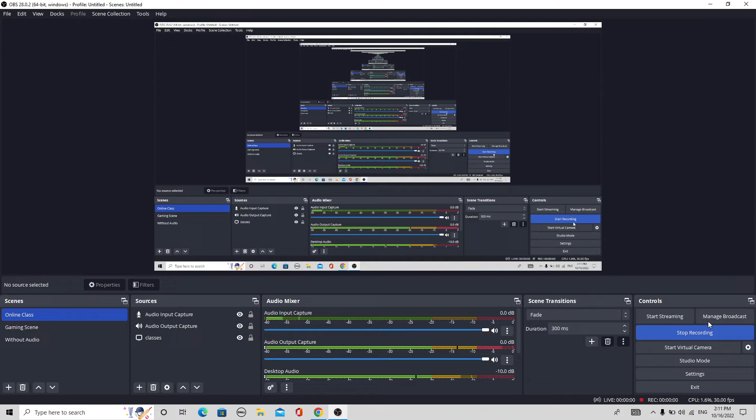गएको लेक्चरमा हामी एक्टिभेटेड स्लज प्रोसेसको बारेमा कुरा गर्दै थियौँ र केही इक्वेसन्सहरू हेऱ्यौँ, हाउ दे क्यान बी डिटर्माइन्ड इन टर्म्स अफ एक्टिभेटेड स्लजको प्रोसेसमा सबस्ट्रेट र त्यसको।

बायोमासको मास ब्यालेन्सबाट we saw that we derived some equations, right? I think we talked about, let me go over to the equations. So we derived some equations using the substrate as well as the biomass को ब्याक्टेरिया अथवा बायोमासको ब्यालेन्सबाट we

determine some डिजाइन इक्वेसन्स। त्यसैगरी हामीले स्लज प्रोडक्सनको इक्वेसन हेऱ्यौँ। एफ्लुएन्टमा बिओडी भनेको बायोडिग्रेडेबल सिओडीको होइन। नर्मली तपाईँको बायोडिग्रेडेबल सिओडी र उसको रिलेसनसिप बिओडीको रिलेसनसिप अराउन्ड 1.6 टाइम बिओडी हुन्छ। जेनरली तपाईँको बायोडिग्रेडेबल सिओडी भनेको इट्स अलमोस्ट 1.6 टाइम अफ बायोलोजिकल अक्सिजन डिमान्ड।

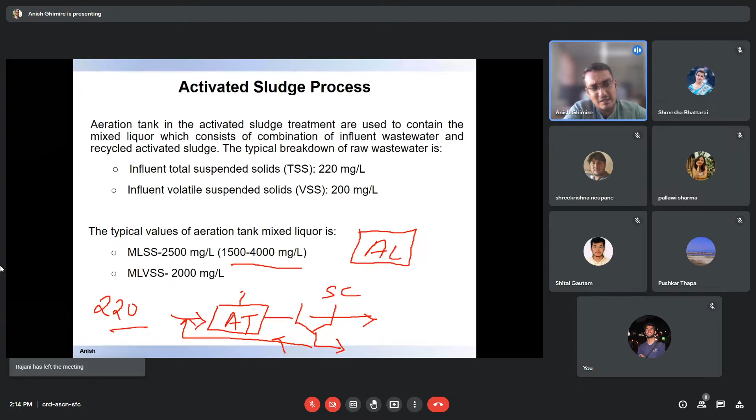तपाईँको इन्फ्लुएन्ट वेस्टवाटरमा around 220 milligrams of TSS हुन्छ, while inside the aeration tank we have 1500 to 4000 milligram of MLSS or close to 2000 milligram of MLVSS। So this is how activated sludge configuration looks like।

So these are preliminary treatment। We already talked about the preliminary and the primary treatment in water quality engineering। So primary treatment, and afterwards there is an aeration tank where there is a biological system।

and a system with sludge recycle। Even in a system with sludge recycle, we discussed two options: one from underflow of the settling tank।

So if you are still remembering the lecture from our water quality engineering, we did some flow, like we talked about some flux theory, as well as type 3 and type 4 sedimentation, for designing a settling tank।

Settling secondary clarifier, the design of secondary clarifier, it's entirely different, it follows a different approach। I think we will also talk about this settling, it's in a separate chapter for that।

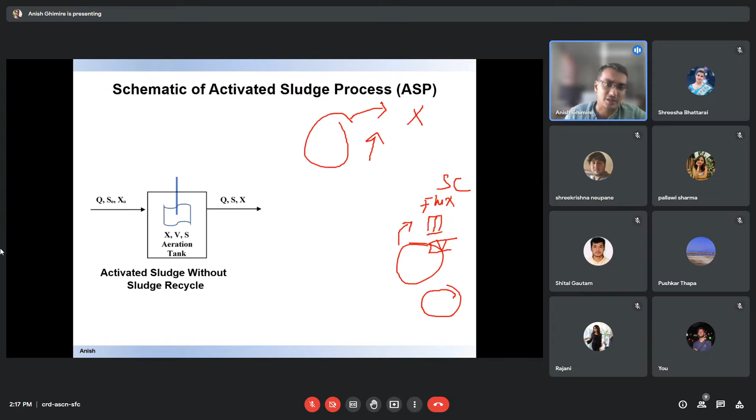I think this is important to know because we also define the SRT as the mass of solids in the reactor divided by mass of solids leaving the system। So if you want to calculate the SRT for this kind of system and this kind of system, you need a ratio between mass of solids inside the aeration tank and mass of solids leaving from the system।

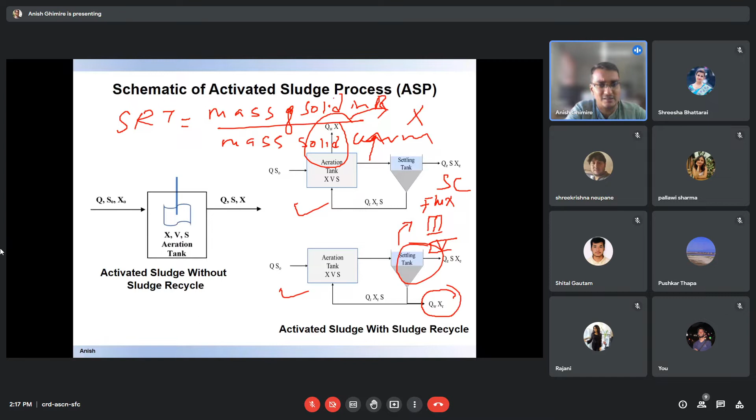Normally while calculating the SRT, we consider that there are negligible losses in the effluent, so the only losses are via the waste activated sludge. This is the assumption we make.

In the sludge system without recirculation, the HRT or hydraulic retention time is the same as the SRT. While in a system with recirculation, your SRT is much larger, or longer, than the HRT.

Let's look at the types of systems. Within the activated sludge treatment process, there can be a high rate system where the food to microorganism ratio is measured as the total BOD coming into the reactor, that is the concentration of BOD in the influent, divided by the biomass in the system and the working volume. This gives you the food to microorganism ratio in the system.

For the extended aeration process, the SRT is long because of extended aeration. Normally we keep a very long SRT, meaning there is enough time for the sludge to stay in the reactor. So there is a chance that the microorganisms or biomass become more stabilized compared with the conventional system. Also the loading rate, or food to microorganism ratio, is less in extended aeration compared with high rate processes. In a high rate process, both the OLR is quite high and the HRT is quite small, compared with extended aeration.

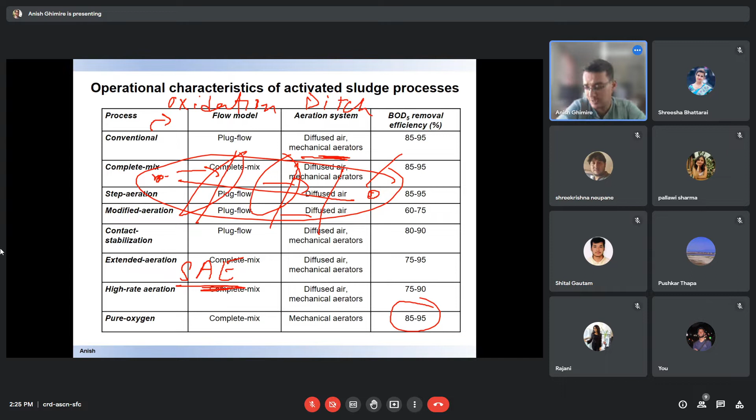So the expected removal efficiency percentage is also different. It's up to the designer's discretion what kind of system they would like to design.

So again we slightly talked about the return activated sludge. Let's draw one diagram again - you have an aeration tank, a secondary clarifier, and then there is a sludge wastage from the secondary clarifier, and a recirculation. We call this recirculation the return activated sludge. So there is a recirculation system - let's say this is a secondary clarifier.

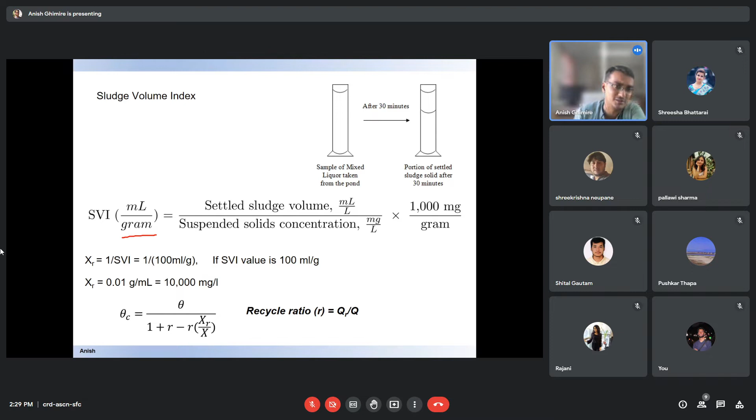So SVI is the volume occupied by 1 gram of sludge. That's why its unit is milliliters per gram - how much volume is occupied by a gram of sludge.

So how do we calculate the SVI? The SVI is calculated using a graduated cylinder.

Let's say you take an aeration tank effluent or sample it from the aeration tank, and you take a 1 liter graduated cylinder, and keep this sludge as a representative sample.

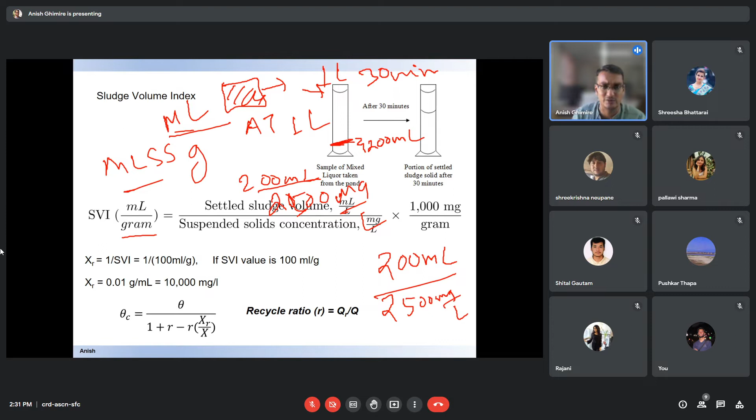In this case, we use this factor of 1000 to convert milligram into gram. So what is your SVI in this case?

So how much is the SVI concentration? It's 200 divided by 2500.

So the value of your SVI is around 80. Let's say it's 80 ml per gram.

So when your sludge SVI is less than 100, you can infer that the sludge has very good settleability.

The sludge settleability is good enough. If your SVI is less than 100 - the lower the SVI value, the better sludge settles.

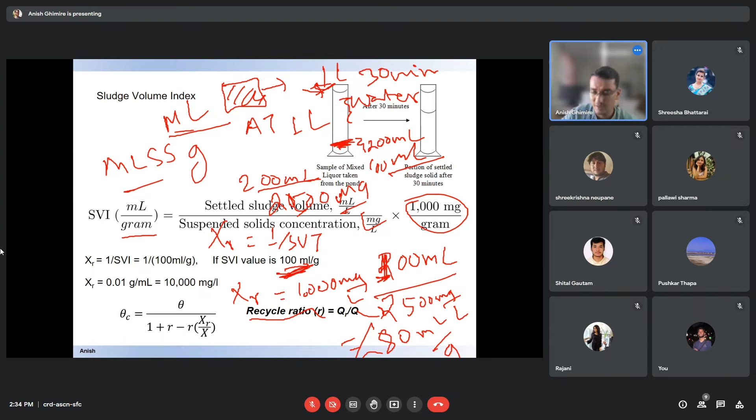The recirculation ratio is a ratio between the return activated sludge flow rate and your flow rate coming into the treatment plant. If Q is your inflow and QR is your recirculation flow, then the recirculation ratio is QR divided by Q. This gives you the recirculation ratio.

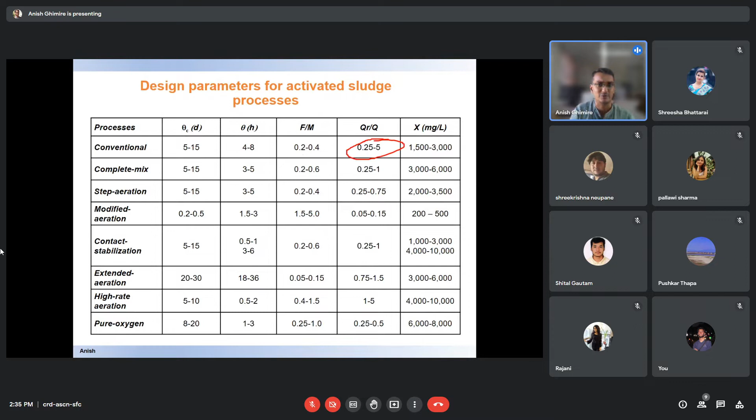In a conventional activated sludge process, the recirculation ratio can vary between 25 percentage of the inflow Q to 500 percentage of the total inflow, depending on your influent characteristics. So your sludge production can be affected, and the recirculation rate is affected similarly.

You can see that different concentrations of biomass have been maintained. In modified aeration, it's only 200 to 500 biomass. In step aeration it's around 3000. In conventional activated sludge, completely mixed system, it's around 3000 to 6000. I think when we last visited the Guheshwori activated sludge plant, they had a concentration around 4000 to 4500. I think the treatment plant has been designed and operated as a CMAS system.

The concentration of biomass there during the visit was MLSS, not MLVSS, so there is a difference. We have MLSS and MLVSS - MLVSS represents the organic fraction of the biomass, while MLSS represents all the organic as well as inert fraction. This ratio is typically around 0.6 to 0.85.

This can vary. When you have a high value of MLVSS to MLSS ratio, this means you may have high active heterotrophic, ordinary heterotrophic organisms. When you have a low value, this means you have more inert material in the system and less active biomass, which is not so good for the operation of the system.

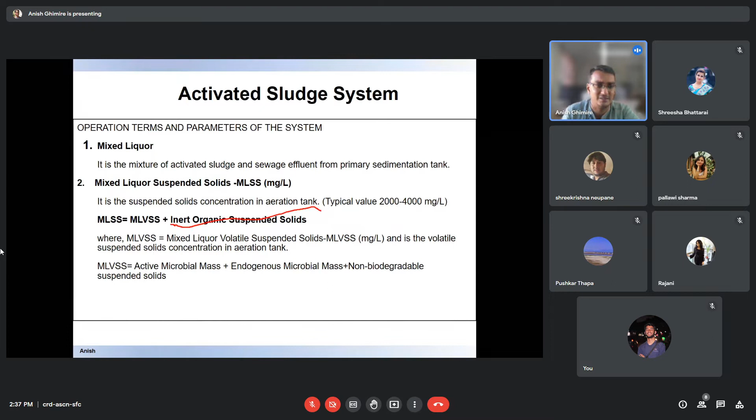To summarize some terminologies and parameters used in an activated sludge system, we call them MLSS and MLVSS. MLSS includes MLVSS plus fixed inert solids - I think this is what we inferred last time. MLVSS represents active biomass, ordinary heterotrophic organisms plus bacteria with endogenous decay.

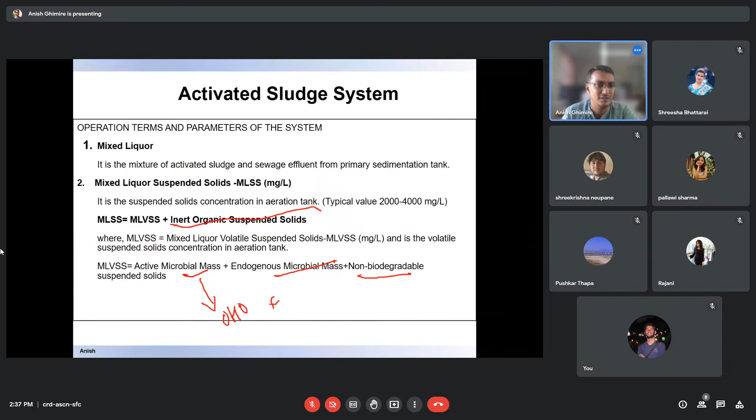Other suspended solids may be included, but those that are organic are part of MLSS. I think in addition to the equation we had before, we also tried to limit the number of kinetic parameters and derive this simple equation, for both systems - with recirculation and without recirculation.

So 1 by theta c, let's say the design minimum SRT, can be calculated using the yield, the food to microorganism ratio, and the desired efficiency, as well as the decay coefficient, which can be represented as KD or B. So what happens is when you have a high F/M ratio, the floc doesn't settle.

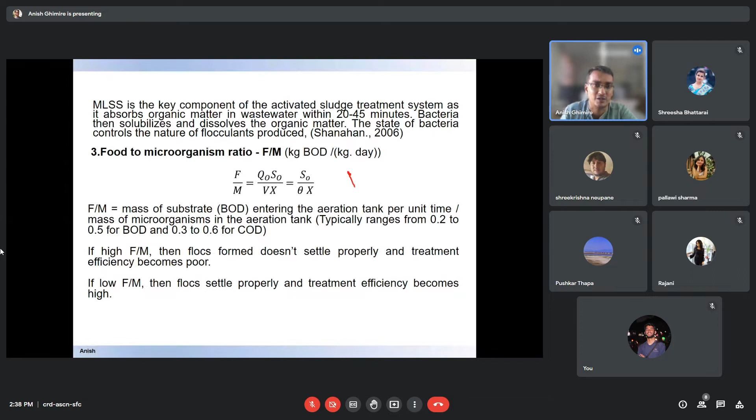During a high F/M ratio, it's possible to have more filamentous bacteria growth facilitated. When filamentous bacteria grow, the sludge starts bulking. For its proper settlement we earlier discussed the SVI. Sludge with filamentous bacteria doesn't have good SVI values - they have very high SVI values, which we would typically like to limit.

Similarly, with a low F/M ratio, the floc can settle properly but treatment efficiency is also high, so we try to find a balance. If we apply a low F/M ratio, our OLR value becomes low. This means there can be some limitation on organic loading rate as well as hydraulic loading, so optimization is necessary.

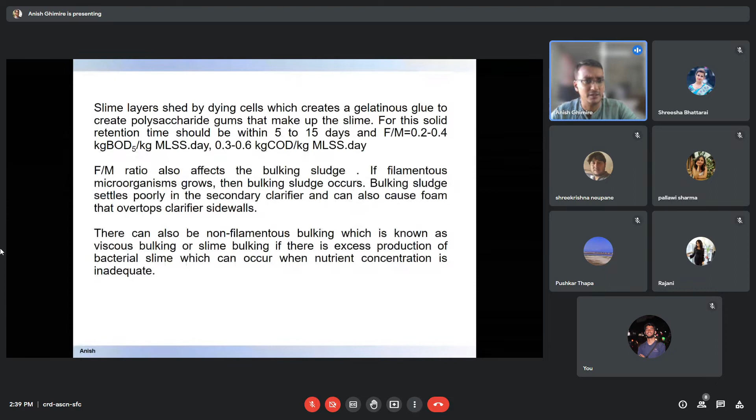I think another thing is we talked about MLSS and then the F/M ratio. The F/M ratio also affects this - if filamentous bacteria grow, then bulking occurs.

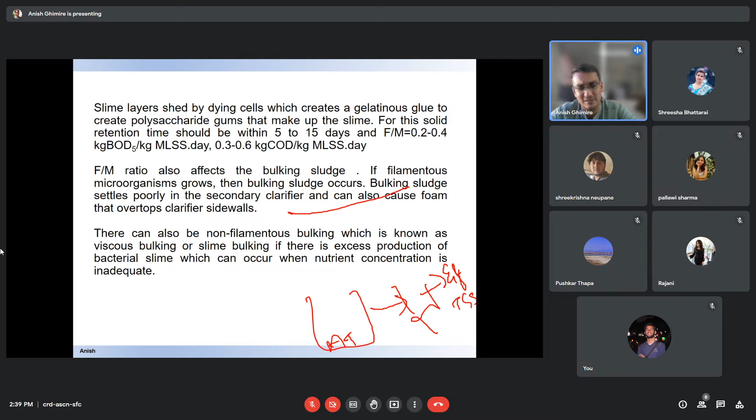So what happens with bulking in your secondary clarifier - normally after the aeration tank and secondary clarifier you have effluent. In the effluent, if TSS increases, it does not give a very good signal - it means the treatment plant is not doing well.

There is also a limitation, typically 50 to 60 milligrams per liter for TSS limitation in the effluent. So when you have sludge bulking, you cannot meet this effluent treatment recommendation.

I think we also talked about the return sludge ratio, recirculation ratio, as well as the nominal and actual hydraulic retention time, mean cell residence time - MCRT or SRT, which we defined as theta c, or also call it sludge age.

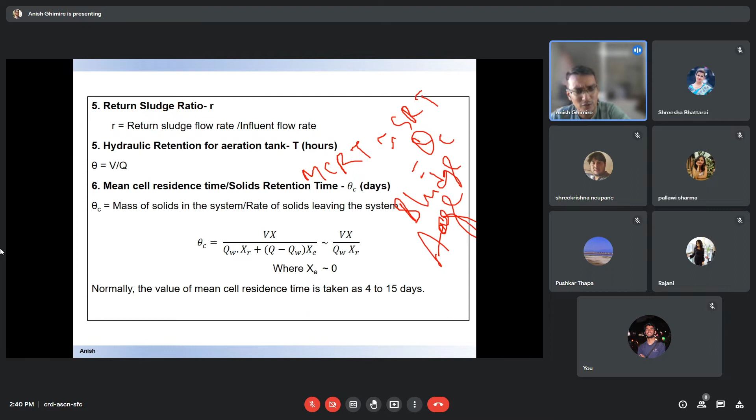Sludge age - so what happens is the solids within the reactor divided by the solids leaving the system. So normally by controlling the SRT you can control the growth of the nitrifiers. Nitrifiers are those microorganisms who can convert the ammonia into the nitrate.

So if you want nitrification in the system you want to have more SRT. Similarly, in winter time you want to increase your SRT because in winter the velocity of the growth is compromised.

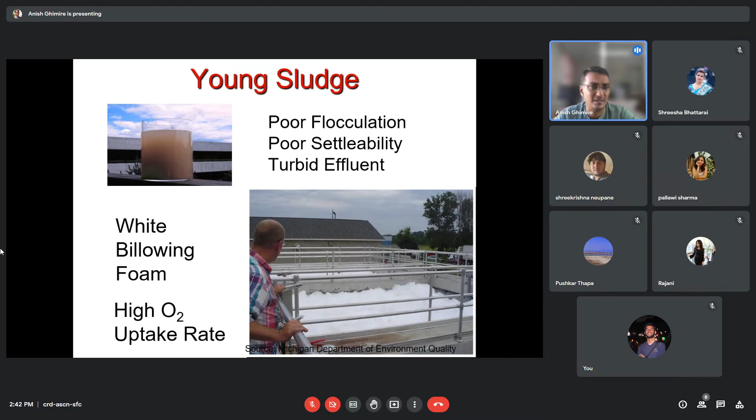This picture is from the initial operating period of the wastewater treatment plant. This is the old aeration tank - we didn't visit there, we only visited the new aeration tank, which is on the other side.

You can see the foaming problem due to the very young sludge, and then the very high F/M ratio causes this kind of issue. So what we want is to have a balance between the old and the young sludge.

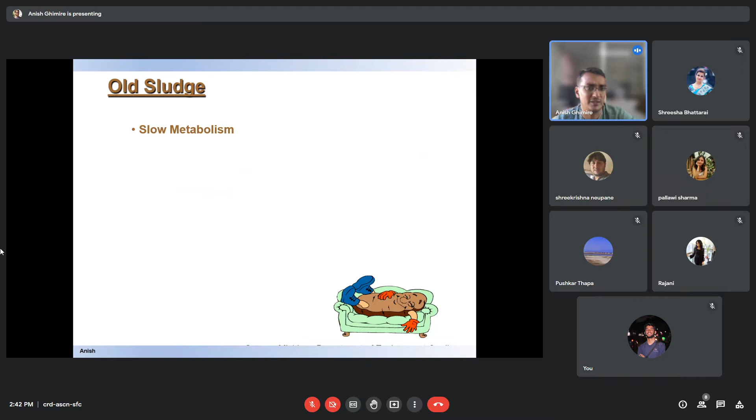What does old sludge mean? It means you have a very high SRT. During the startup period, either you need to bring the sludge from another treatment plant, otherwise old sludge can be maintained. There's decreased food intake as well as low cell production.

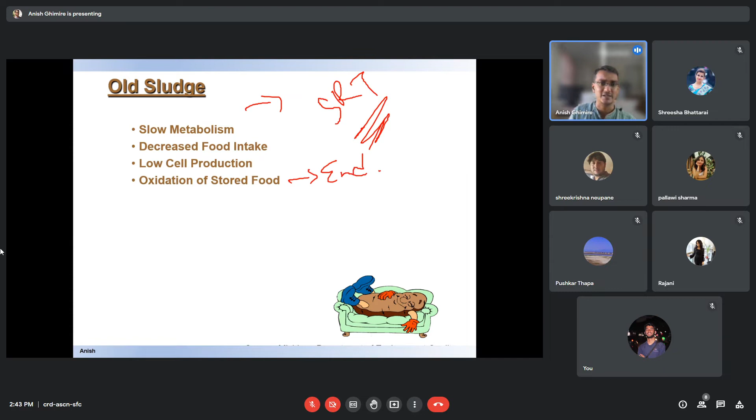There is oxidation of the stored food. Their own endogenous decay may occur, which can take up some of the oxygen, so the oxygen demand also increases. That is not good for the aeration energy.

Similarly, high MLSS and high retention time are there. I think we also talked about the oxygen required calculation in the PDF given, and we discussed it while going through the PDF.

Similarly, we haven't talked about oxygen uptake rate. Oxygen uptake rate is how much oxygen is required per unit volume of the aeration tank.

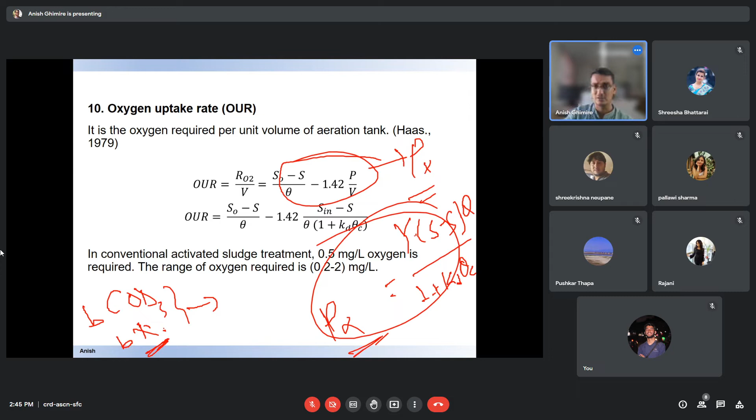So I will not go through this aeration topic in detail, because chapter 6 deals with the different kinds of aeration, and we'll talk about it in detail there.

In the activated sludge treatment process, we can use different kinds of aeration systems. There is a separate aeration and settling, which I think is the secondary clarifier chapter.

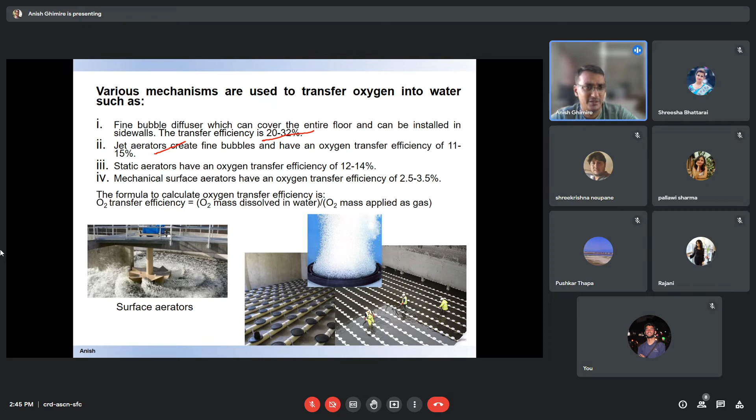Fine bubble diffusers have a very high oxygen transfer or air transfer efficiency. There are also jet aerators, static aerators, and mechanical aerators which are the surface aerators. This shown is the mechanical aerator, and this is the fine bubble aerator.

Fine bubble aerators release very small bubbles, which increases the probability of transferring oxygen from the gaseous phase into the liquid phase. That's why they have very high efficiency - per kilowatt of electricity, they can transfer 3 to 4 kg of oxygen. That's the beauty of the system.

Coarse bubble diffusers have slightly lower aeration transfer efficiency, but they are better than surface aerators which have the lowest oxygen transfer efficiency. Fine bubble diffusers have 3 to 4 kg transfer in clean water, while 2 to 3 kg in the activated sludge system.

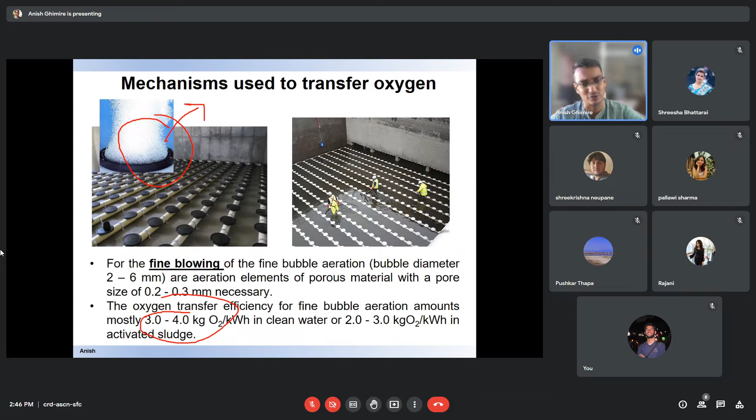While in surface aerators, per kilowatt hour of energy input, it's not 1.82 - it's 2.2 that gets transferred. So oxygen can be transferred in different ways, and they have different kinds of oxygen transfer efficiencies.

You can see these are kind of jet or diffuser systems - these are oxygen diffusers. Diffuse aeration can also be done by making holes in this kind of structure.

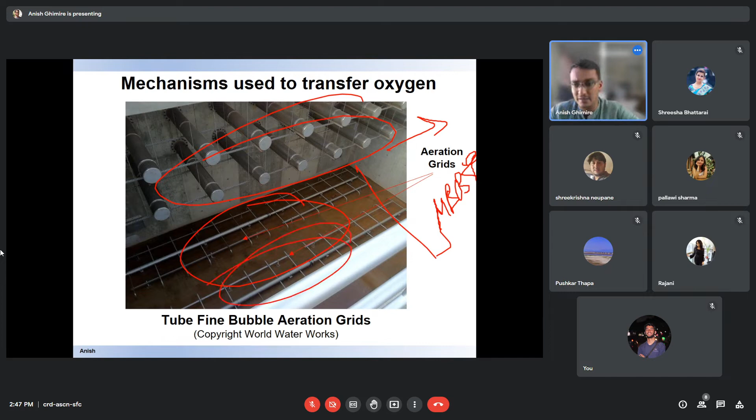Actually this is an MBBR tank - a moving bed biofilm reactor tank - and you can see different aeration grids are there. This is a completely mixed system, shown here as a drawing schematic diagram.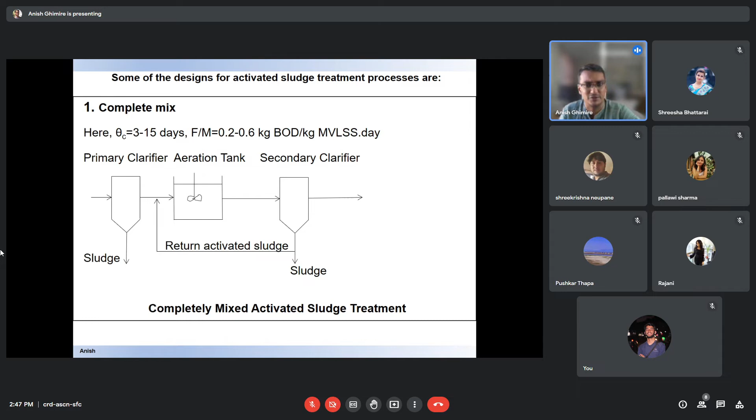You can see the typical values of the SRT and F/M ratio, with the operational conditions given here for the completely mixed system. While in the conventional plug flow system, what happens is it's a very typical oxidation ditch system - it operates as a plug flow system.

What happens here is you have high biomass concentration and the SRT value is less. Now here, maybe this zone has a plug flow configuration - it's not a CMS system. You can see there are several zones, maybe aerobic zones could be there.

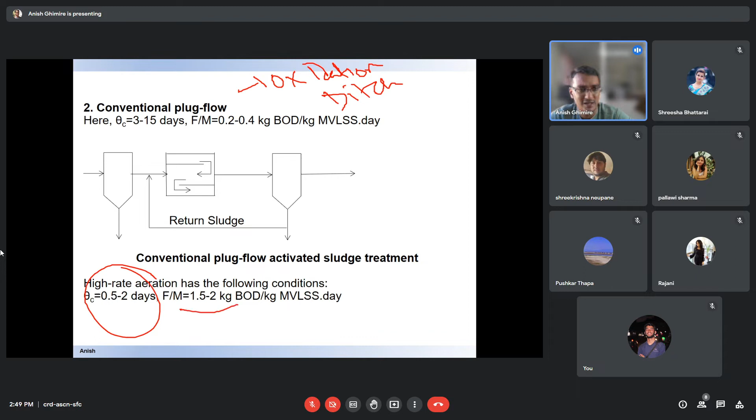Also the retention time varies between half a day to 2 days for a high rate system. So this is a high rate system - you have a very high F/M ratio, and the SRT is also very low.

While in the conventional system, you have 3 to 15 days of SRT and 0.2 to 0.4 kg, so the F/M ratio is quite low. And in the extended aeration system, you have a very long SRT - that's the reason for this.

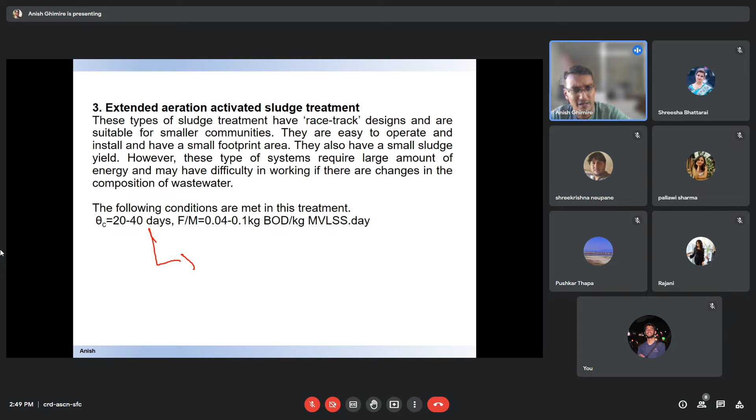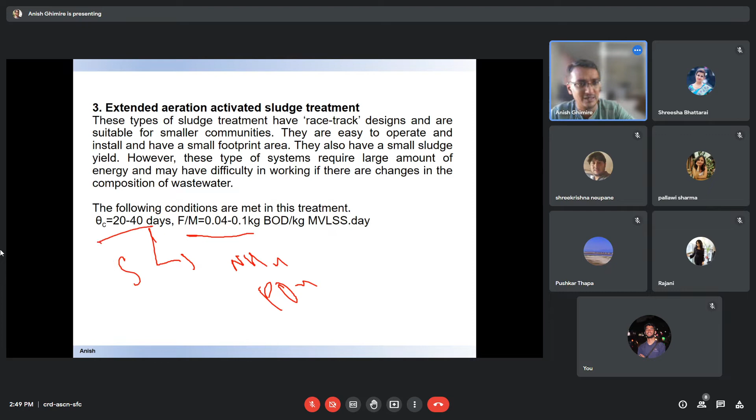Depending on your feeding regime or aerobic conditions - where you are feeding your system - you can also achieve nitrogen or ammonia removal, and phosphorus removal can be achieved in the extended aeration system. So you have a very low F/M ratio while very high SRT.

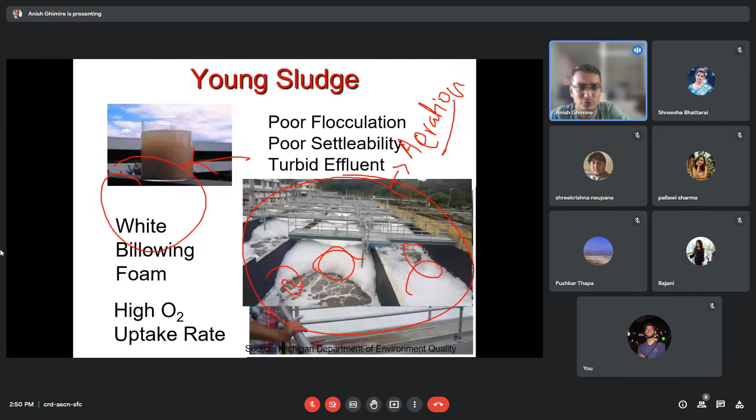You can see this is the carousel type of oxidation ditch system. I think earlier I shared a photo of Guheshwori - let me go back again. Okay, so actually this system used to be a carousel type oxidation ditch.

What was here previously - on one end there was an aeration system, and on this end there was another aeration system. So when wastewater moves in this direction, aeration would happen here, and then somewhere there are different anoxic zones, and again aeration would happen here, and then there is the outlet. This kind of system was there - a very classic example of a carousel type oxidation ditch.

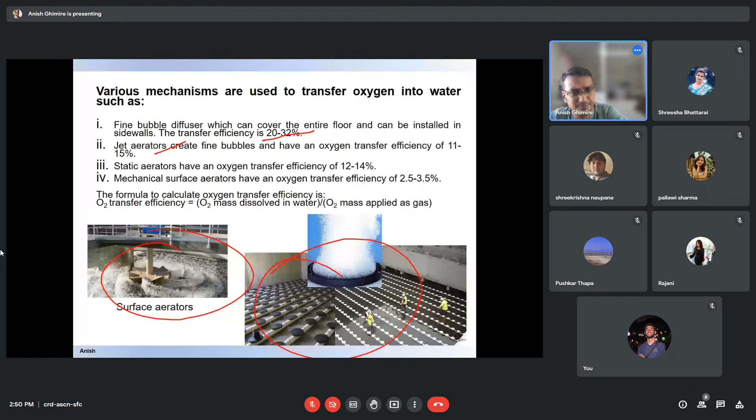So this is another kind of plug flow extended aeration system. I think we talked about this - obviously, what governs the ASP design is what is the design effluent BOD level.

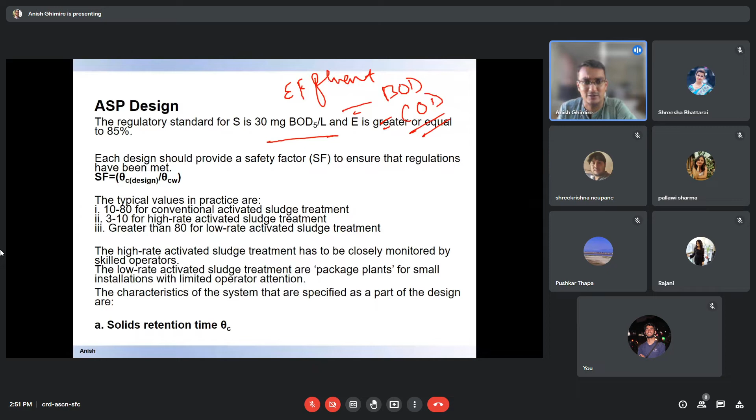So what would be the level of the effluent BOD or COD you like to maintain? It depends on that. Let's say the influent, you can pretty much know what is coming in the effluent.

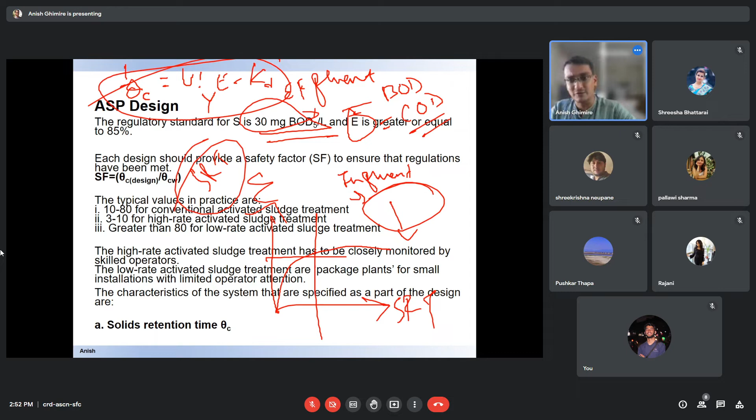Let's say your first question should be what is your objective? Is your objective only to remove the carbon, or is your focus also to remove the nitrogen? First, let's say if your focus is only carbonaceous removal, then 3 to 5 days could be enough for the carbon removal.

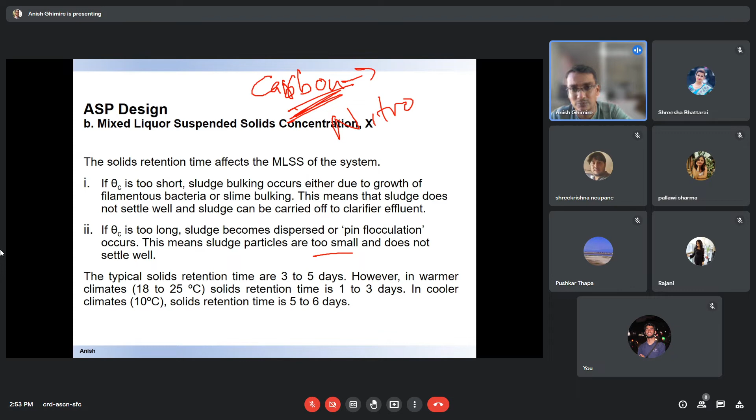So the settling, there's a problem with that, so optimum settling could be, the zone settling velocity, so depending on this, your optimum, let's say the velocity of the sludge can be calculated using the...

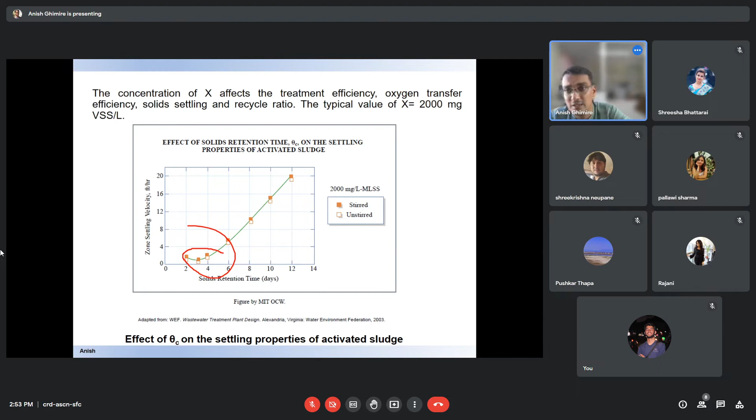Let's say the optimum SRT can be calculated using the predetermined settling velocity, also the typical operational range, that's why it is somewhere between, it also depends on how the SVI values are affected by...

Okay, it's not then. So I would like to start the carbonaceous removal. I think I covered the basics of the activated sludge. Maybe repeated, maybe a few things are covered in the undergraduate course as well.

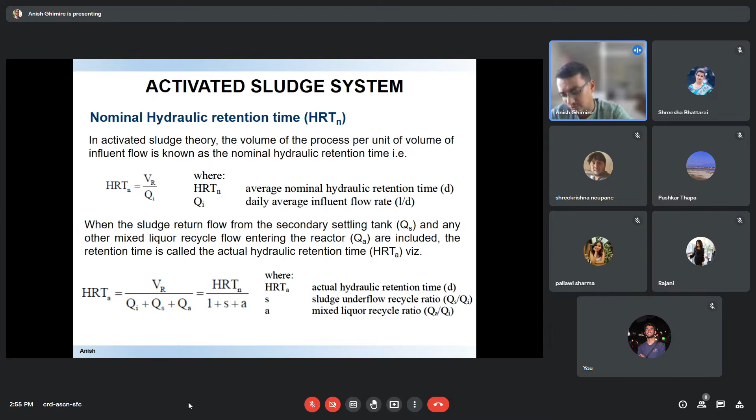But I would like to, I think I covered the basics of the activated sludge in the earlier slide. So now the focus is on the carbonaceous removal, right? I think we discussed some of the terminologies and the relationship between HRT, SRT, and what is SRT.

And we discussed all these points. So if there's a system with solid liquid separation, your SRT is much higher than the HRT.

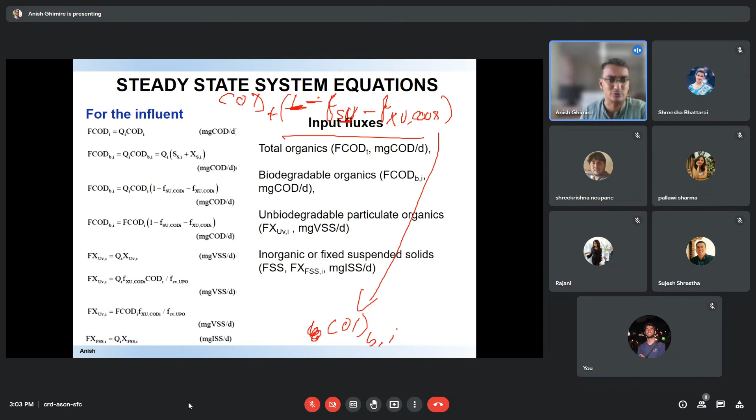So the total flux of biodegradable COD can be represented as the flux of COD multiplied by the fraction of biodegradable COD. Now, what is the total unbiodegradable inert fraction?

So XU inert, that is the unbiodegradable fraction of COD in the influent, equals total inflow multiplied by the particulate form unbiodegradable COD fraction multiplied by the total COD fraction, divided by FUPO, the unbiodegradable particulate organic fraction. So F is the fraction of the unbiodegradable particulate organic matter.

Fraction of the particulate organic matter. This will give you Fx UV, the flux of the unbiodegradable particulate matter.

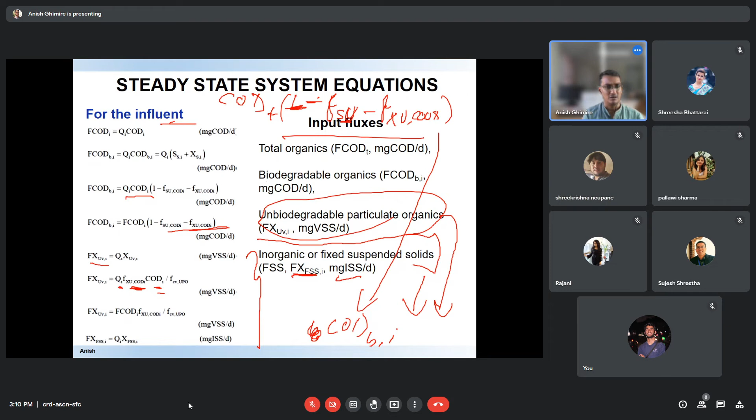So just remember that this OHOs is the active bacteria inside the reactor. So FBI, like we also wrote it as FBI is equals to F COD total multiplied by 1 minus inorganic soluble को fraction of COD minus organic particulate को fraction. So this will give you the fraction of the biodegradable COD in the influent. So this multiply, I think you should know this equation.

I think we calculated. We are just using the sludge production formula here. सो दिस विल गिभ यु द अगेन, अब कति रेसिड्यू बाँकी हुन्छ त्यही गरी कन्सन्ट्रेसन।

Mass अफ दि टोटल मास अफ दि इन्डोजिनस डिके भएर बाँकी रहेको रेसिड्यू कति हो त? टोटल एमएल टोटल OHOs को मासमा कति फ्रेक्सन चाहिँ यसको इनअर्ग्यानिक अथवा इनर्ट फ्रेक्सन छ अथवा डिकेको रेसिड्यूको फ्रेक्सन कति छ, मल्टिप्लाइड बाई कतिको रेटमा चाहिँ डिके हुन्छ, द्याट मल्टिप्लाइड विथ दि टोटल मास अफ दि OHOs in the system. So this will give you, so now you can modify the above equation as this form, FCOD. So this will give you the mass of the residues in the endogenous residue in the system.

त्यसैगरी इनअर्ग्यानिक अर्ग्यानिक अनबायोडिग्रेडेबल फ्रेक्सन कति हो त, त्यसको मास रिएक्टर सिस्टममा भन्दा कति इनअर्ग्यानिक बायोमास, कति इनअर्ग्यानिक पार्टिकुलेट म्याटर अथवा COD आइरहेको छ, त्यसको फ्रेक्सन कति छ, अर्ग्यानिकको फ्रेक्सन कति छ, मल्टिप्लाइड बाई दि SRT। सो दिस विल गिभ यु दि टोटल फ्लक्स अफ दि, will give you the total flux of the or total mass of the inorganic organic particulate matter in the reactor.

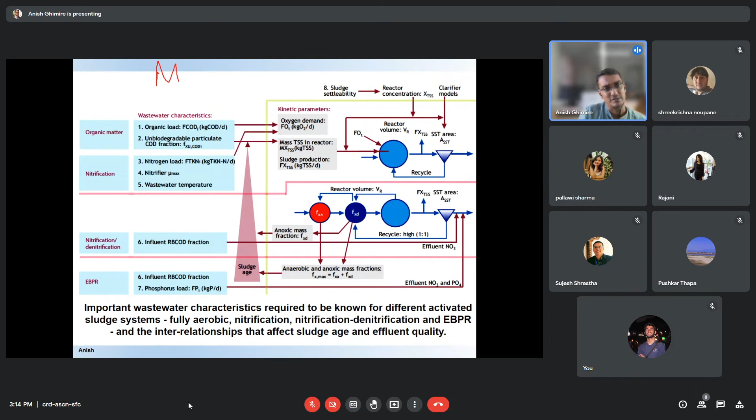This is nothing new. Okay, so अब किन थाहा पाउनु जरुरी छ? So we wanted to know what is the sludge production in the reactor, so what will be the expected MLSS, what is the expected MLVSS or MLSS in the system, right? So this is what we are trying to know.

अब यसको कम्प्लेक्सिटी, कतिको फ्र्याक्सनेसन पनि कतिको लेभलमा गर्ने भन्ने कुरा, it depends on the objective. If your objective is also nitrification or denitrification, so we are interested in influent readily biodegradable COD also. So if our intention is enhanced biological phosphorus removal, we wanted to know what is the fermentable fraction of the COD, right? So it depends.

For now, I think it is only important if you can know the total biodegradable fraction of the COD, कति हो त COD को biodegradable fraction, right? So त्यो थाहा भयो भने I think it's more than sufficient to know or to calculate the TSS in the reactor, the oxygen demand, carbonaceous oxygen demand, and the sludge production rate can be calculated for the system, right? Okay.

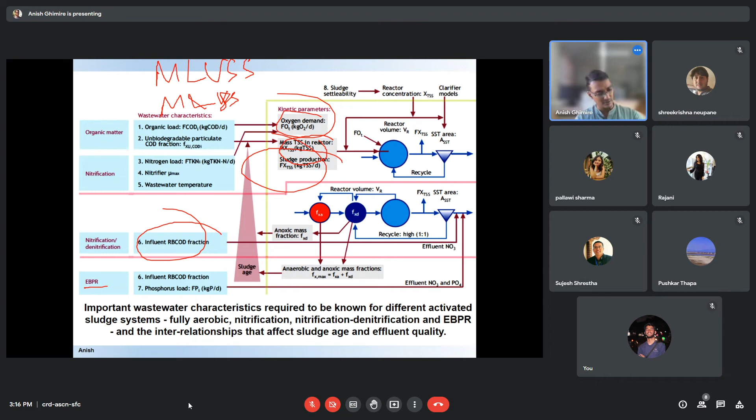Okay, so similarly in the earlier system we calculated the MLVSS. We only calculated the MLVSS. Now let's say if we are interested to know what is the total MLSS.

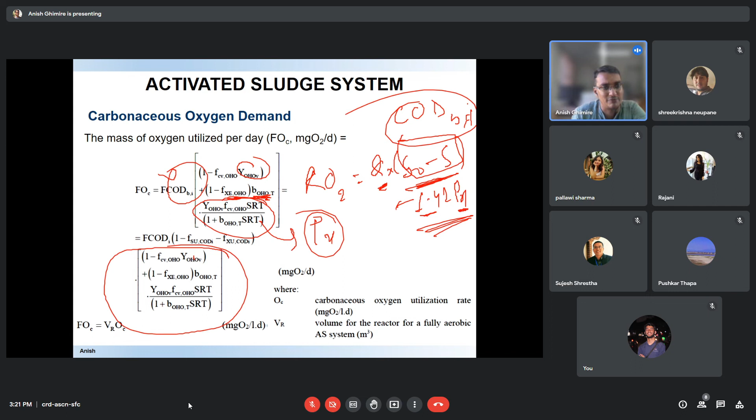So total carbonaceous oxygen demand of the reactor. So if you just want to remove the BOD, your total oxygen requirement can be calculated using this equation. FOC is the carbonaceous oxygen demand, milligrams of oxygen required per day, or kg of oxygen required per day, and that is the carbonaceous oxygen demand.

Let's say if you want to determine the volumetric oxygen demand, then you divide it by the total working volume of the reactor, which will give the volumetric oxygen requirement, right? Okay, so now let's look at the equation here.

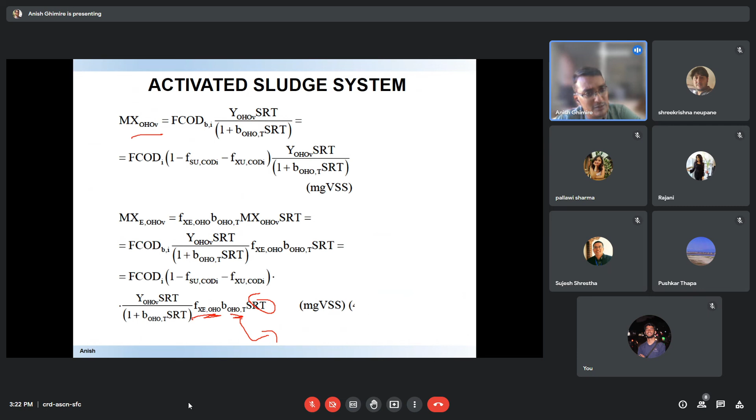If you are interested to know the concentration of the biomass, the only changing factor here is the SRT. At different temperatures your fXE,OHO remains constant, but B is also dependent on temperature - at 10 degrees you do it, at 20 degrees you do it. So the only variable parameter here is your SRT. When you change your SRT, your sludge production also changes. Everything changes - the concentration and mass of the active organism changes, the residue it produces also changes, and your inert organic fraction mass also changes with the change in SRT.

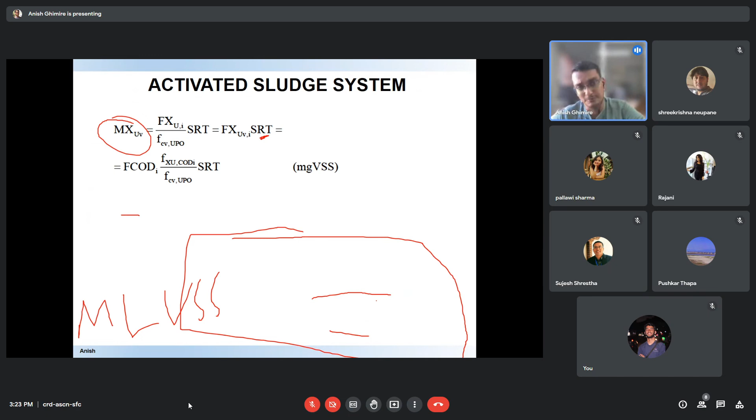So at the end of this lecture I will give you an assignment. You need to see that during the changing of different SRT values, what will be the change in sludge production, and what will be the change in the carbonaceous oxygen demand, because with the change in SRT value, your carbonaceous oxygen demand also changes.

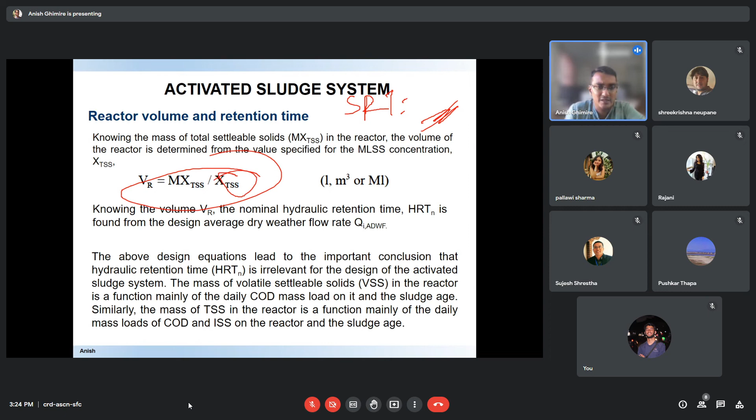Two things we need to determine - we also need to determine what the expected MLSS concentration is that we like to operate at. Going back to the slide, remember there were different technologies - extended aeration system was there, conventional activated sludge system was there, and a completely mixed system was there. Different systems have different concentrations of XTSS. So which sort of system would you like to operate? It depends on the designer's discretion - what kind of system you want to design. So you select the XTSS.

We can calculate this using the COD loading rate. What we can do is calculate MXTSS. How do we calculate MXTSS? Using the COD influx - from the COD influx, using the kinetic equation we mentioned earlier. You can calculate this using the COD influx and COD fractionation. Now if you divide it by XTSS, you can calculate the working volume of the reactor for which you like to keep this XTSS concentration.

2000, 3000 - how much to maintain depends on what kind of system you're designing - extended aeration, conventional activated sludge, or completely mixed system. So depending on that, you select the XTSS and calculate the reactor volume. Okay, I think I'm going to stop here - it's been almost 1.5 hours.

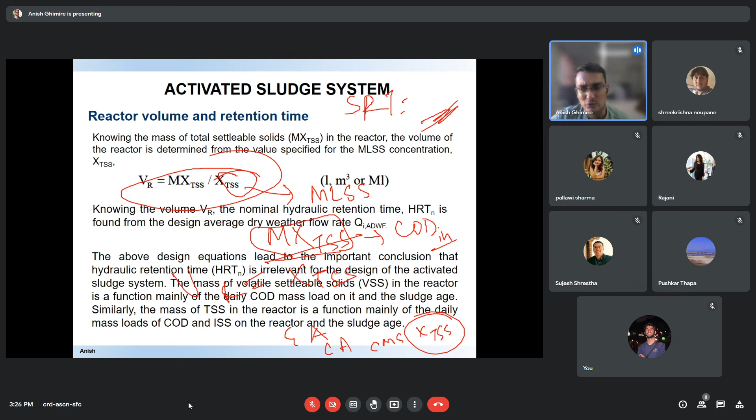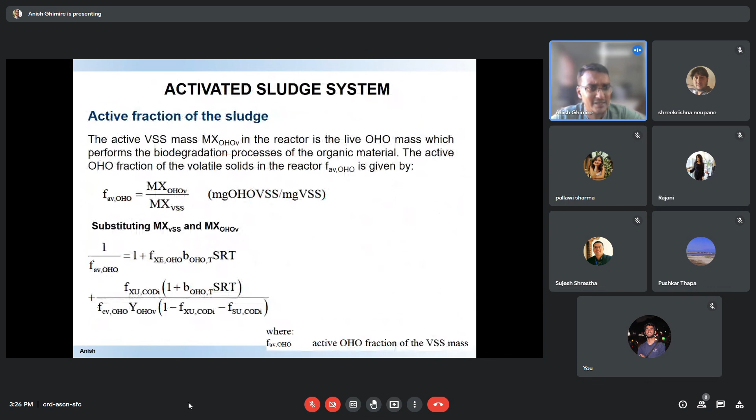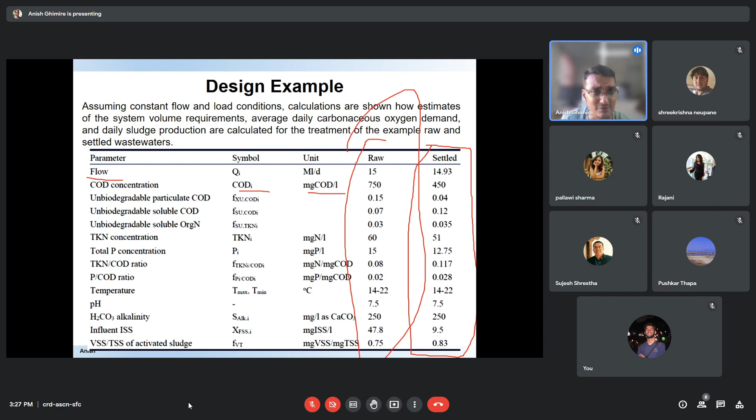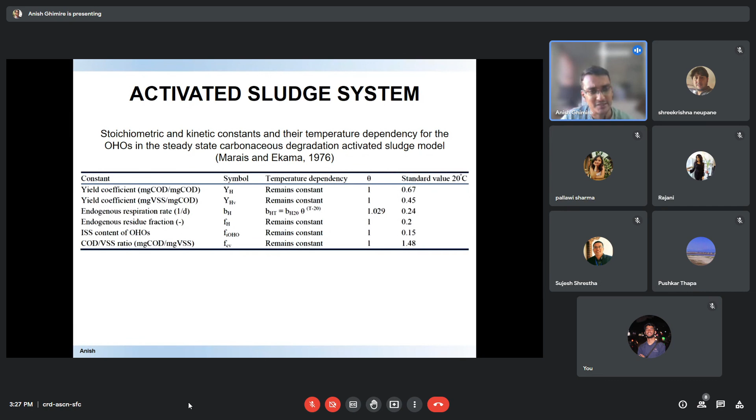So what we do is calculate - let's say these parameters are given for a particular temperature. So I will fix the design temperature. Let's say we do it for both 14 degrees and 22 degrees. So for both 22 degrees and 14 degrees we calculate the endogenous decay of OHO. We know this can be calculated using the standard 20 degree temperature, theta to the power of T minus 20. So using this equation we calculate the endogenous decay.

So using this endogenous decay factor, what you need to calculate is the mass of TSS.

So the reactor system aeration tank, what is the total mass of TSS and what is the oxygen demand? What is the active fraction of the bacteria? So total active fraction OH and how much TSS needs to be wasted.

During the changing, let's take the SRT from 3 to 30 days SRT. So what you need to do is prepare an Excel sheet calculation, where you calculate the different mass balance that we calculated before.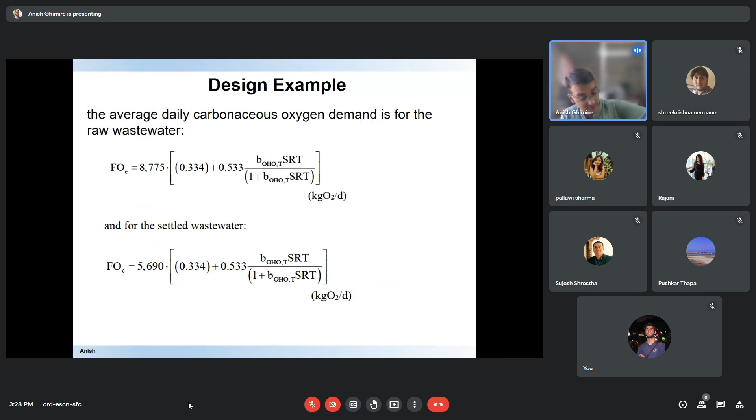So here's one example given. I will also talk through this example maybe on Tuesday. So one thing I would like you to do is try to calculate, come up with a calculation. I'll show you one example.

So what I would like you to do is, for both raw and settled conditions, calculate ML, MXTSS, XVSS, as well as calculate for both 14 degrees and 22 degrees Celsius.

You need to calculate the oxygen. I think you just need to plug the equations, these equations we discussed earlier, right? So depending on the given conditions you are given.

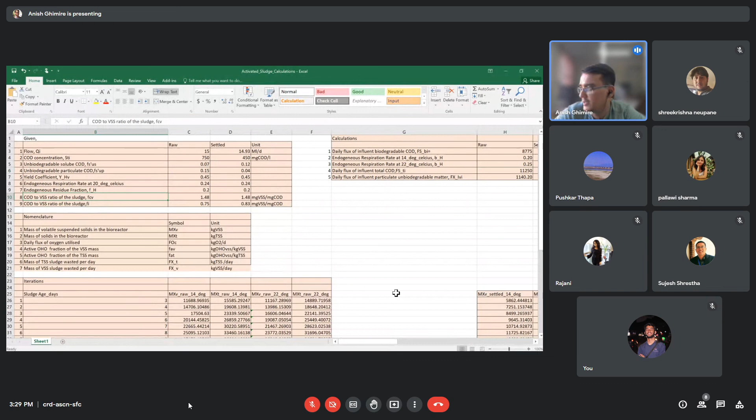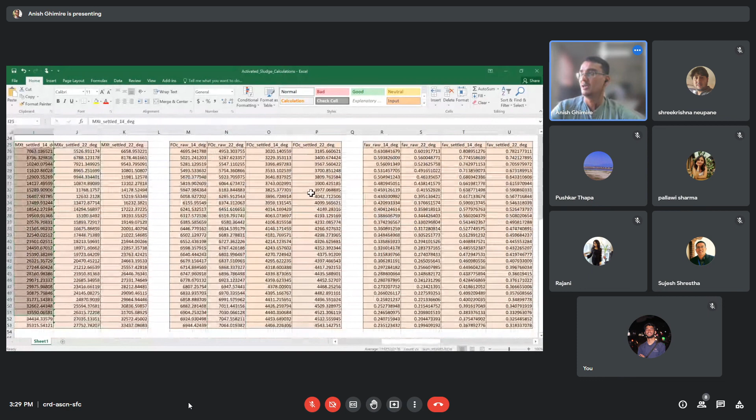So this is what you need to calculate, and I think you need to come up with some sort of these graphs.

So mass reactor - when you change the SRT from 3 to 30 days, how your MXTSS, MXVSS is going to change for both 14 degrees and 22 degrees Celsius.

Also the active fraction, how the fraction of fav changes, similarly how your waste sludge quantity changes - what is the quantity of waste sludge, meaning sludge production, daily sludge production - you just need to calculate the daily sludge production.